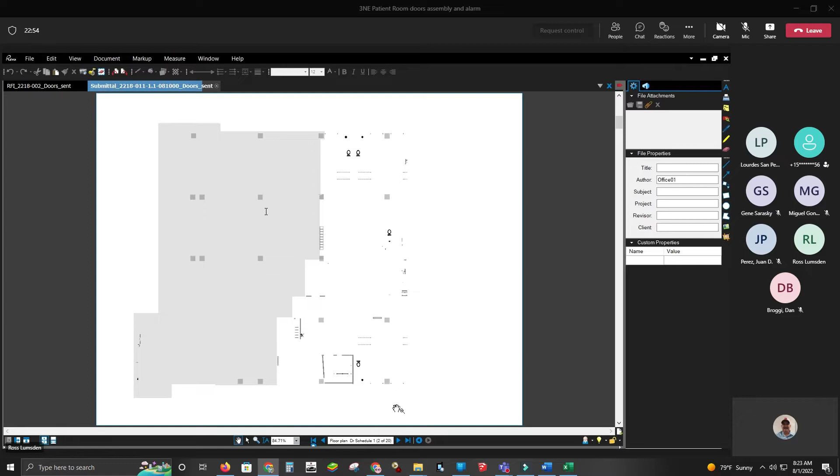Hey Gene, do you recall what - no, but this is not the hardware schedule. This is the RFI, no? No, it's not. Can you guys see my screen, a floor plan? Yeah. Okay, this is submittal number 11, so we're all looking at the same page. Okay, perfect, submittal number 11.

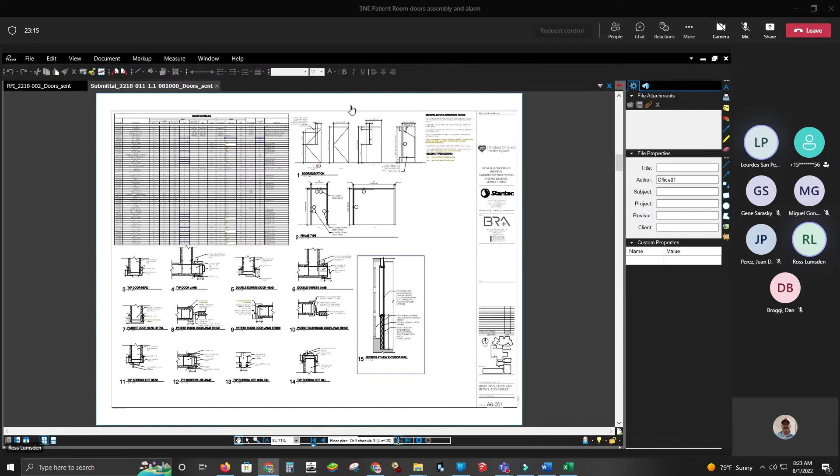Okay, I'm getting to the hardware schedule. So Shan, where would you tell me to go? If you go to page - I think you need to go to heading 9. Yeah, heading 9, page 16. It's going to be door number - it's the stairwell doors, 63S. Right, there you go. Okay.

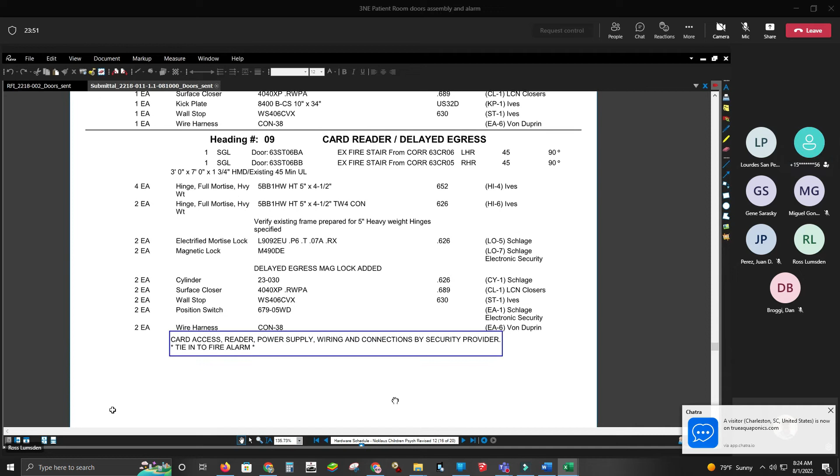So the short answer, Gene, to your question is we are providing an M490 delayed egress maglock at those openings. Perfect - you are or you are not? We are, if it's in the schedule, I'm providing it. Okay, so the short answer, Gene, is you don't need to provide it. No problem, we've already got it, I'll take it out of my quote. That's all I was looking for. Okay, yeah, see where it says - and then we are going to have another maglock depending on the response of the RFI.

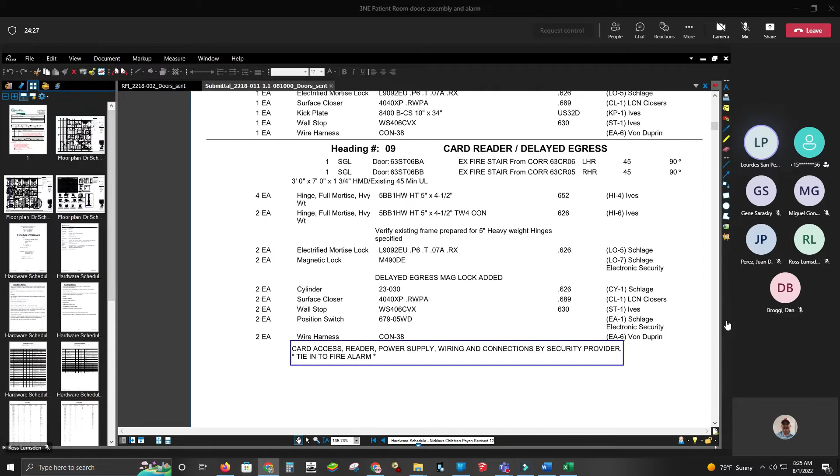If that door keeps the double swing, that's gonna require another mag lock. Worst case scenario, let's assume that's what's gonna happen. This one, the existing, that is gonna be new now.

Right now, Sean doesn't have anything on this door. Nothing, right Sean? Correct. Hang on, everybody. You've got it written as existing, but we know that cannot be existing. 63, CR03, hang on please.

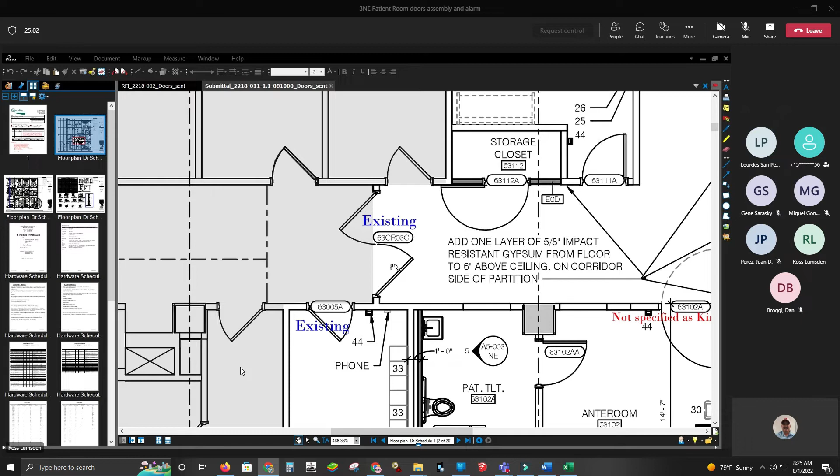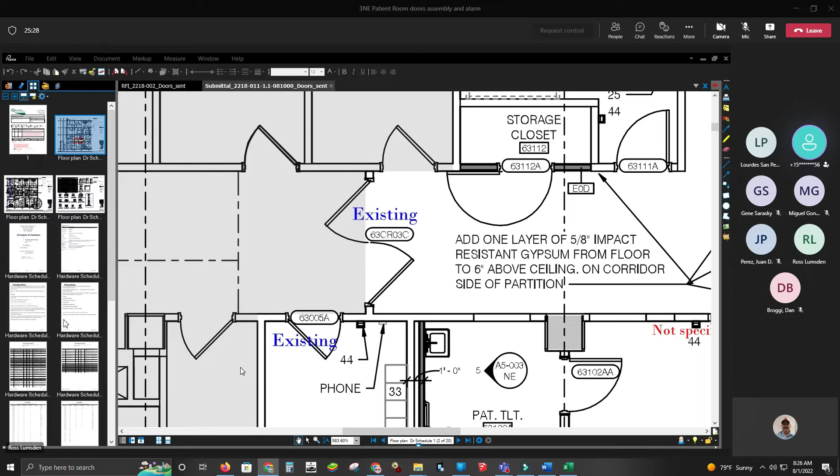Okay, so if you go to heading 11.1, go down to that heading. See it? So you've all added it in there. So we didn't add it. Actually, if you go to the hardware specification, it talks about hardware set 11, which is an existing door, but we carried the hardware.

Remember, this is the one we were talking about. It's either going to be a single swing, meaning a standard pair, or it's going to remain, because the frame, according to engineering, and the doors are beat to hell. So we were talking about taking it out and putting a whole new assembly in. And the question was about the door orientation as it relates to card readers and all the other things. That's the RFI. Correct, that's the RFI.

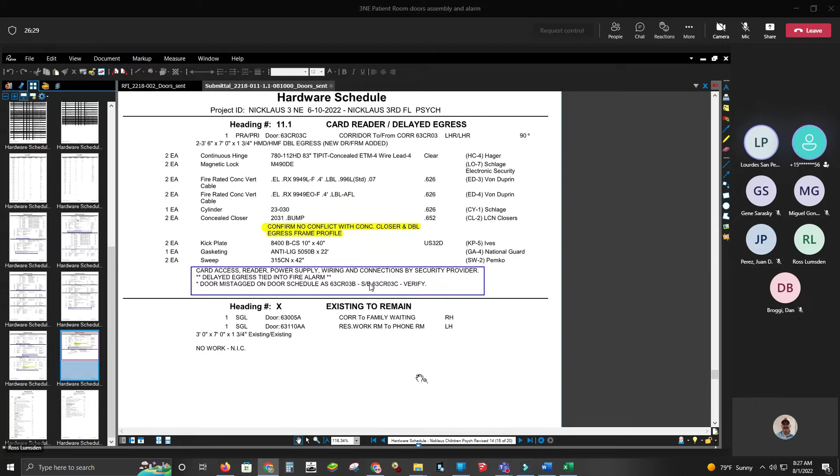And they haven't responded to that RFI. So the short answer is, we have that product listed at 11.1, we currently have that in that hardware schedule. So we're carrying it. You've got hinges, but you don't have, you're carrying the frame and the door as well, or just this hardware? We don't know, we haven't done anything with the door or frame yet because we haven't gotten the RFI back.

Just want to make sure we're all on the same page. So what we're doing at this current point, so Gene is aware, we've got 2 of the hinges, 2 mag locks, because we're going under the assumption it's going to remain double egress. Why does that need a mag lock? It's always closed. Well, let me put it to you this way.

If they're going to go with a card reader of some sort, right? There's going to be a card reader. Everything that goes in that door, it has, I think it has an intercom, some sort of fingerprint for the people to go out. There's a lot of things in that door. Gene and Miguel, can you help us? Correct, card reader in and out with intercoms.

Right, and so we're tying it in with electric latch retraction, okay, and the magnet. Why the magnet? Because you have to be able to get in. It never has to remain propped open, right? It's just gonna pop open and then close. The magnet is because it's double swing, unless you swing the door in just one direction. If you have double swing, you need a mag lock.

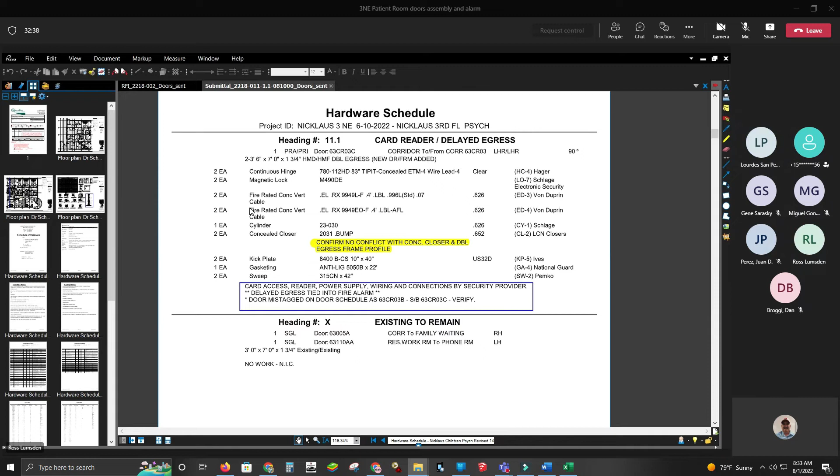Can we check the two? I am worried about the other two doors in the corridor. Can you go to the floor plan? No, the next one, the other one, that one. Yeah. It would be, so these doors, let me see where they are. Yeah, these two, this one and this one.

So those have maglock because those doors are double swing too. Give me a door number, Ross. 63 CR 07A. But those are already inside the suite, right?

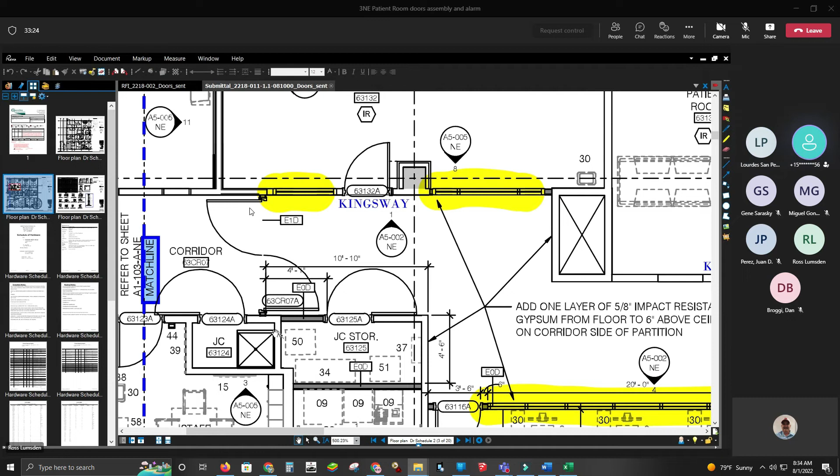Yes, yes, but the thing is, okay, this one doesn't have a card reader, okay. They don't, no card reader. That's on hardware set heading 11. Those are 63 CR03A and 63 CR07A. There are no card readers there, okay.

Perfect. Okay, so Security 101 team, please, any other questions that you need to understand your scope? Nope, we're good. That was everything we needed.

You're good, so you can give the information to Rafael to do the proposal? Yes, we'll talk with him in just a little bit, and we'll get that worked up for you, send it over, and then we'll send a set of drawings marked up with what we're gonna need from the electrician as well.

Okay, no problem. And you know, the main entrance door is gonna be double swing, so you know what that door is gonna take. If you have any further question about everything that goes in that door, feel free to reach out, Ace. He will tell you everything he wants in that door.

No problem, we'll do. Lourdes, I just had two questions. So I believe Security 101 are giving their proposal directly to you, correct? They're working for you. Correct, yeah, for the hospital. And I want to get the PO done as soon as possible.

And then the low voltage wiring, is that part of Security 101 or is that another third vendor? No, low voltage, IT has a low voltage subcontractor. Okay, you remember that meeting that we had for the nurse call, it was to understand the scope of each one.

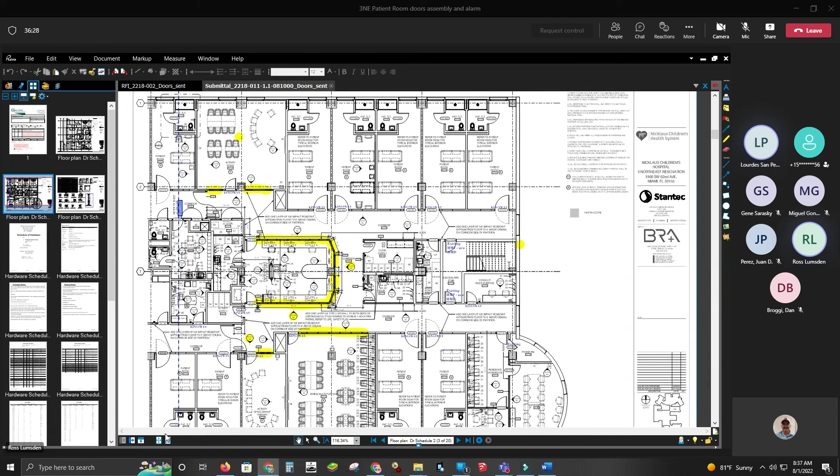Okay, that's all the questions I had. Okay, so any other questions? BR+A, Juan, do you have any question?

Yes, Lourdes, just to confirm, they will be sending you a marked up drawing, I'm guessing an electrical drawing, marking exactly which doors require power provided. But my other question is, the new doors have control panels, and when I looked at the drawings it looked like one control panel could take about 6 doors. So there's going to be more than one control panel, and I'm wondering if they are the ones locating these control panels. Is that correct, Sean?

Well, that is not going to be Security 101. That would be door top alarm, because they are turnkey, so they will wire, install, everything. And there's something we will need to find out: where those control panels that they have for the door top alarm are going to be.

Correct. Gene and Miguel, do you have any idea? That's where I was going with that. Well, it could be the IT room, or there's another closet in the corridor where the IT people wanted to put these panels. So we'll probably have to have a separate conversation with IT, who isn't here.

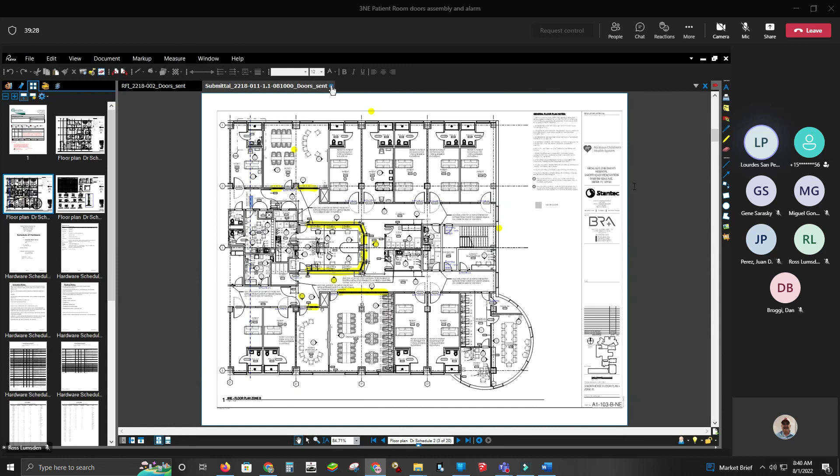Dan, we need your help to get the response to this RFI, and also to give Garrett all the revisions they don't have. They have the permit set, but not the revision responding to AHCA comments, and no revisions associated with the nurse call. We need to get that to Garrett so they can review, and if there's any change order, it's going to be for sure with the AHCA comments review. They need the revised door schedule, all of that. I'd like you to send me today, before end of day, the date you anticipate the revision will be ready. Is that possible? Yes. Okay.